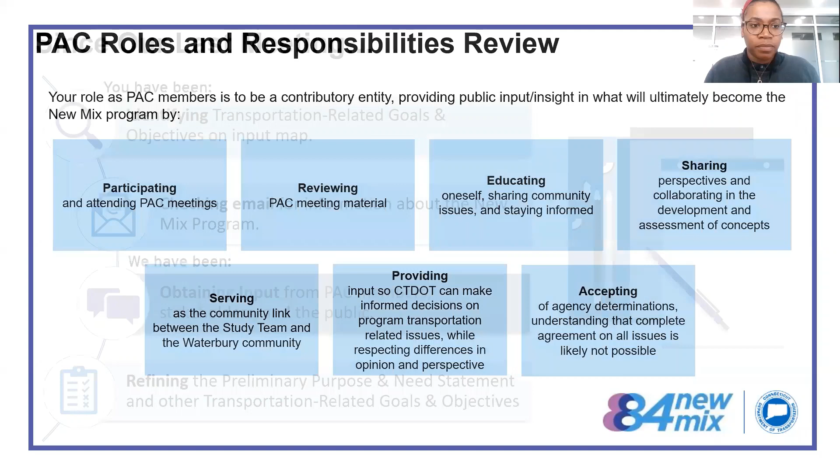Since our last meeting, you have been identifying those transportation-related goals and objectives on the input map, and also checking your email for any information on the New Mix program. On our side, we've been obtaining input from you all, the PAC members, and the public.

We've been taking that input and refining our purpose and need statement and other transportation-related goals and objectives. These next few slides will be very familiar, so I'll move through this quickly as a review of our first meeting.

What is the New Mix program? It's a long-term planning study looking to find a solution on how to reconstruct the Mixmaster interchange. We are using the federally recognized PEL, or Planning and Environmental Linkages approach for this study, in order to find the best solution for the Waterbury Mixmaster.

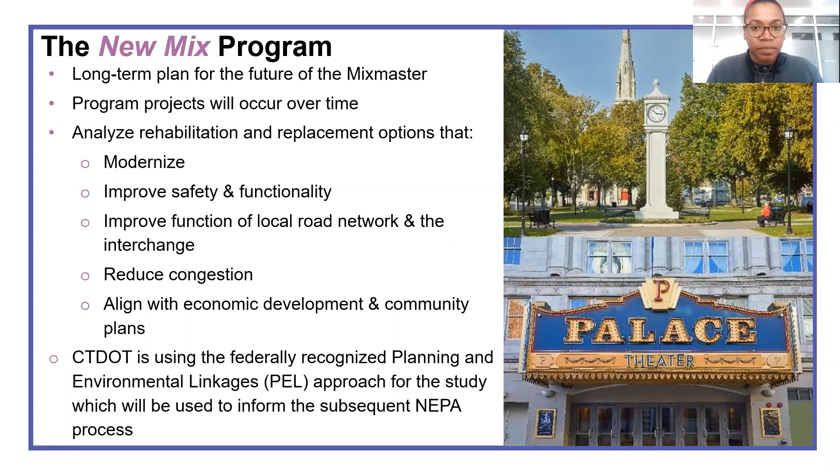We will be using this PEL approach to inform the subsequent NEPA process. This slide is also familiar - it depicts the anticipated steps in the full PEL process. As you can see, there are several steps we've identified to make sure this study is successful. Right now, we are developing our purpose and need and transportation-related goals and objectives.

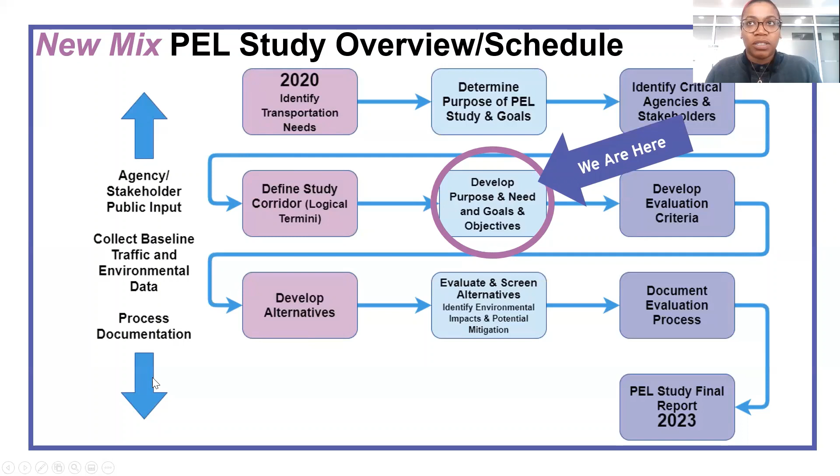There have been some ongoing research and study products produced to get us to this point in time. During this presentation, we'll be reviewing the data collected in our analysis needs and deficiency report, which corresponds to that first box - identify those transportation needs. I'll get right into that now.

The analysis needs and deficiencies summary - what is this report? It summarizes the details and results of the various studies performed as part of Connecticut Department of Transportation's planning process for the New Mix program. These studies consist of data collection efforts and engineering analysis for transportation, community, and environmental context features within the project study area. These studies have been collectively performed to identify the existing transportation network deficiencies and also to predict future deficiencies.

This report will serve as a source of information to develop the program's preliminary purpose and need statement as part of the PEL study process. That preliminary purpose and need statement will also be used in the subsequent NEPA, the National Environmental Policy Act process that follows the PEL study. This report is available for your review on the program website. After this meeting, I will send a link in the email where you'll be able to access this document.

In the next upcoming sections, my colleagues will review with you a few of the determinations that resulted from this analysis needs and deficiency report, including structural, geometric, traffic, multimodal, community, and environmental conditions.

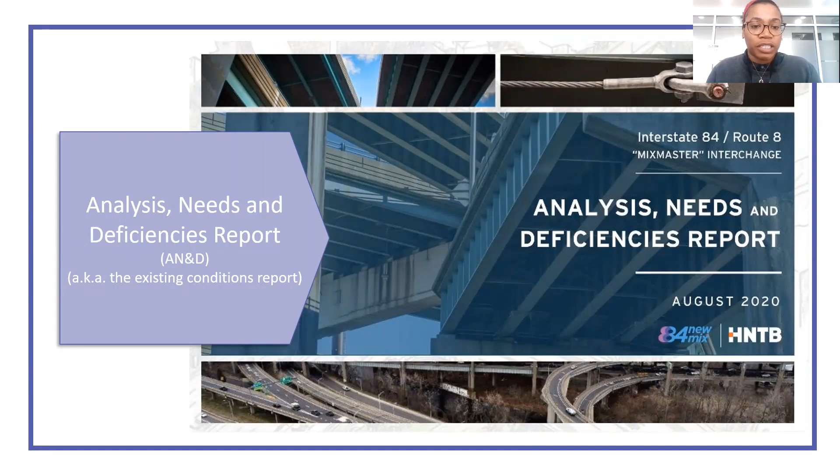Before we get into it, these are just some commonly used terms. I did send out the PDF prior to this meeting, so if you have any questions on any of these terms while we're going through the presentation, since they are recurring, just flip back to this slide and you'll find it. Two of the terms I wanted to touch upon are system ramp and service ramp.

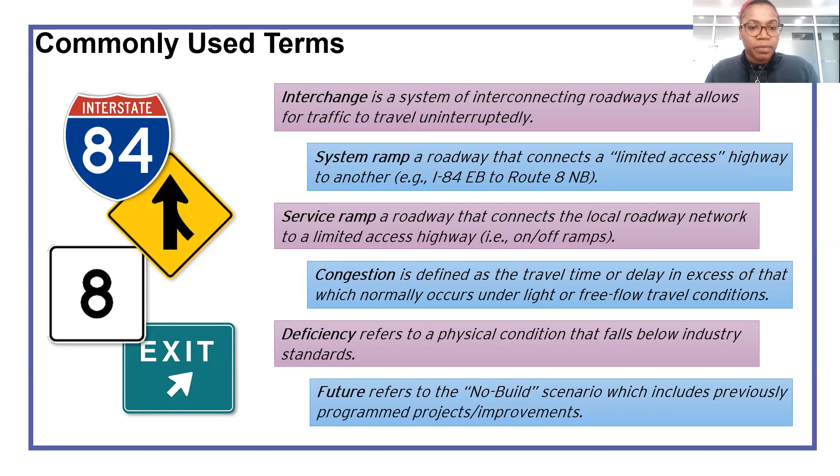A system ramp is a roadway that connects a limited access highway to another. For example, I-84 eastbound connecting to Route 8 northbound, or Route 8 southbound connecting to I-84 westbound - those are examples of system ramps. A service ramp is a roadway that connects the local roadway network to the limited access highway - what we colloquially call on and off ramps to access highway systems.

Now I'm going to hand it off to my colleague Chris to get into the structural portion of the presentation. Thanks, Naomi. This first section is going to be on structural deficiencies at the Mixmaster Interchange - these will be the existing structural deficiencies and anticipated future structural deficiencies. Whenever we say future during this presentation, we're referring to the New Mix program's future design year, which is 2045. You should all understand why we picked 2045 for the design year by the end of this section.

Back to structures - first, I'm going to introduce some commonly used bridge terms to help with everybody's understanding. We'll begin with that circular graphic on the left. These are the three main components of a bridge, and we're going to be working from the ground, moving up.

First, you have the substructure. That's the foundation of the bridge.

On top of the substructure is the superstructure. That's what gets you over the crossed feature. And then on top of the superstructure is the deck. That's more or less what the vehicles are driving on when they cross the bridge.

Decks are typically made out of reinforced concrete, and in Connecticut, we usually have a thin layer of pavement on top that we call a wearing surface.

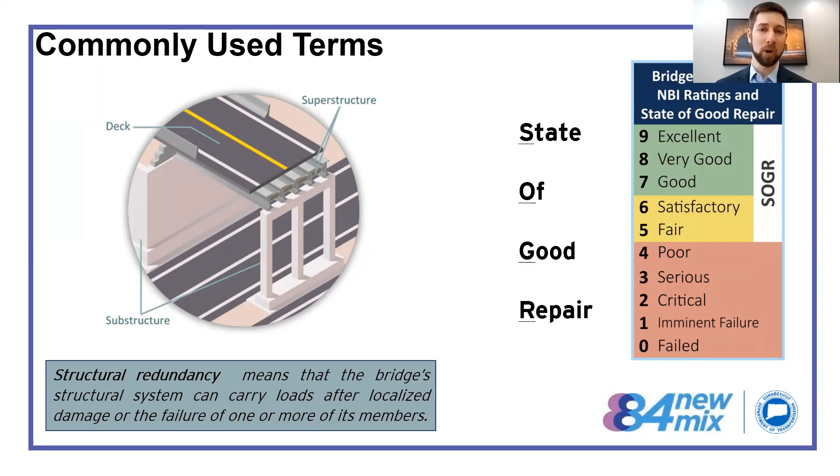Last thing we have on this slide in the lower left-hand corner is a definition that is structural redundancy. Structural redundancy is a best practice in bridge design that ensures that a bridge will stay standing if there is localized damage to a part of it. Structural redundancy is a good thing. So let's move to the next slide.

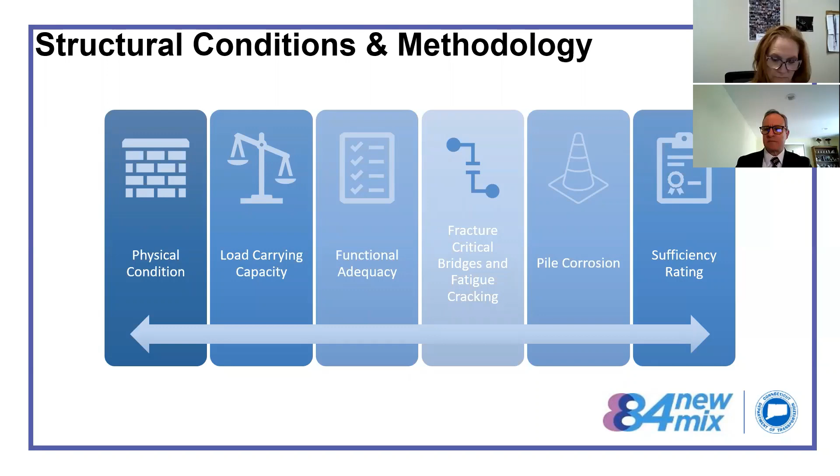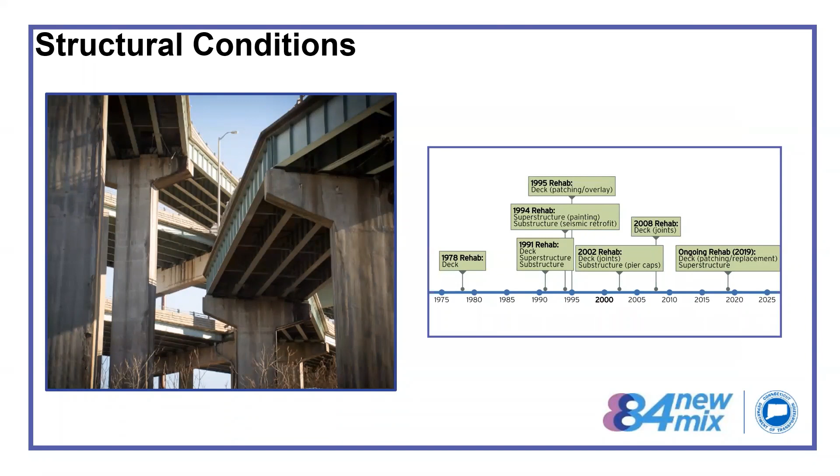All right, so on the left-hand side of this slide is a nice photo from the interior of the interchange, what we call the core of the interchange. I think it's looking north. This photo does a really good job showing the complexity of this Mixmaster interchange, showing the multiple stacked levels of bridges. You can also see those main bridge components that I introduced you to previously: substructure, superstructure, and then if you look really hard, maybe you can see the underside of a concrete bridge deck.

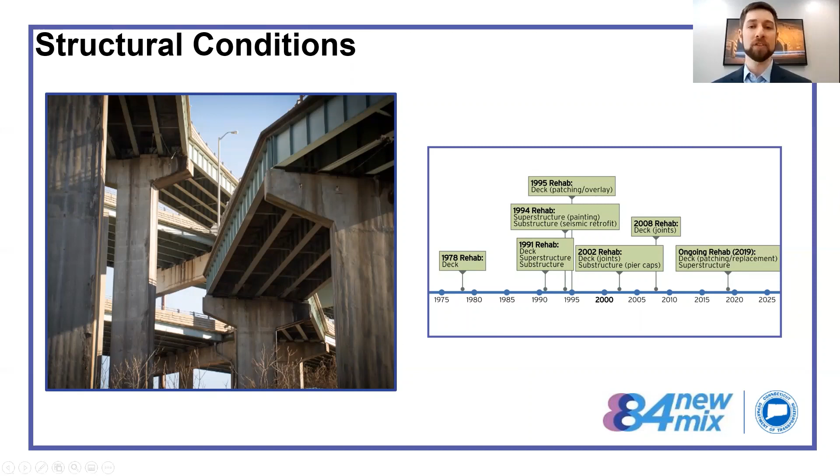On the right-hand side is a timeline depicting the rehabilitations that have been performed on the Mixmaster. So all of this infrastructure was built in and around the 1960s, and you can see that within about 20 years of the initial construction, the first rehab was already occurring, and that's continued every 10 to 20 years through the present day. There's a rehab project going on now to improve the physical conditions of the Mixmaster interchange, and many of you are experiencing the effects of that daily.

Periodic rehabilitations, they kind of come with the territory for structures that are exposed to the elements. As soon as they're built, they start deteriorating. It's just their nature. One thing that I'd like everybody to note is how frequently the bridge deck component shows up in these rehabs. Vehicular loadings and repeated winter applications of roadway salts put a lot of wear and tear on this bridge component, and that means that it requires more frequent rehabilitations.

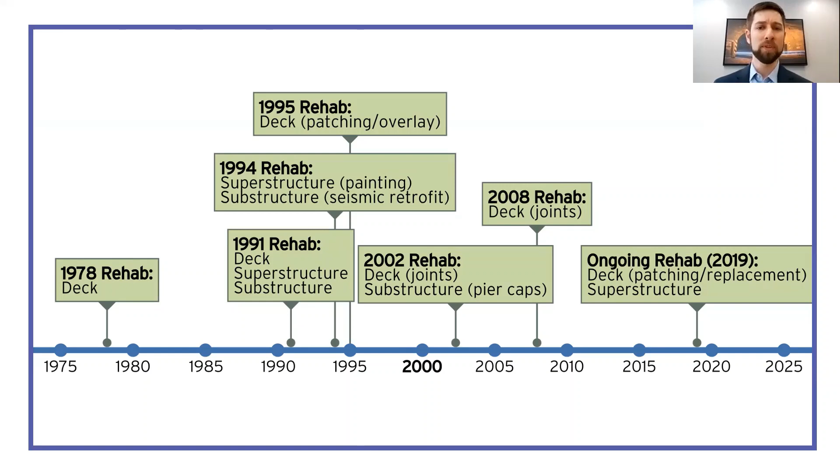So that's all the intro matter. If we move to the next slide, I can get into some statistics from what we studied.

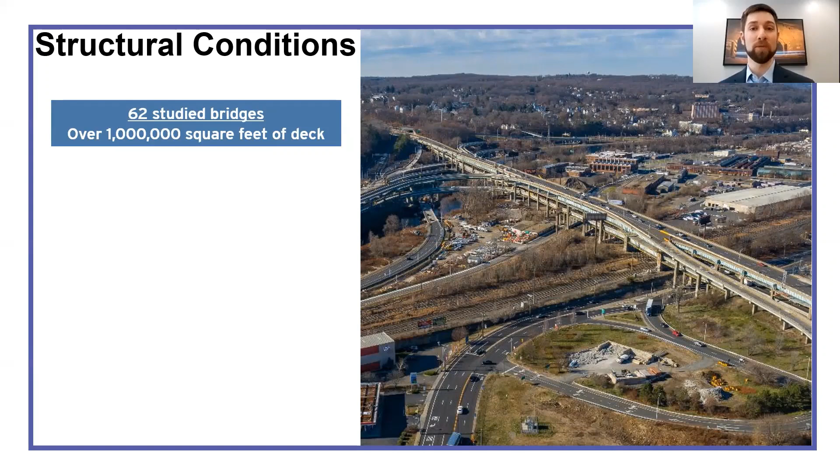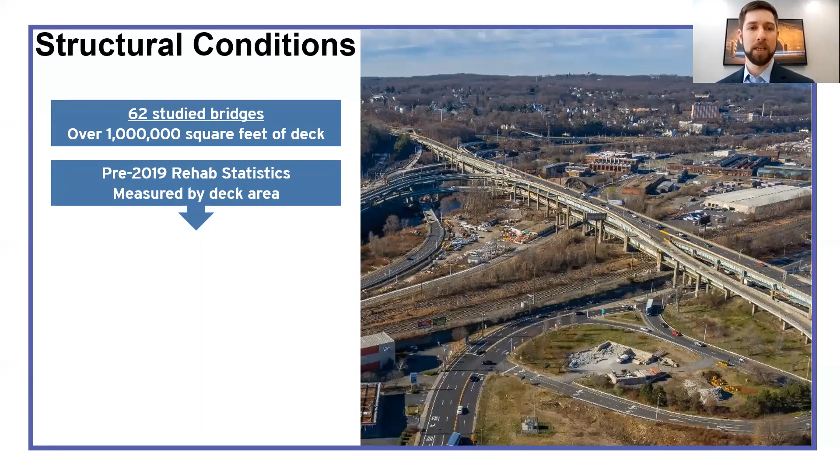So within our study area, there were 62 studied bridges with a combined bridge deck area that exceeded 1 million square feet. That's just a big number that's meant to impress everybody with the amount of bridges that are out there. Every statistic that follows from this point forward is going to be a pre-rehabilitation statistic. That is when our data collection was performed, and it's the best information that we have to share. So we did want to share it with you. However, just keep in mind that at the conclusion of the ongoing rehab project, some of these numbers will be out of date. So one last note, these are stats that are measured by deck area, not number of bridges.

So the first one is structural deficiencies, and that's bridges that are in overall poor condition. At the time of our data collection, 60% of the bridges by deck area were structurally deficient or in poor condition. Now, classifying a bridge as structurally deficient does not mean that there's a safety issue.

However, it does mean that the deficiencies are notable enough that they require maintenance, rehabilitation, or replacement. Hence why the rehab project is ongoing right now. Again, at the end of that rehab project, this is no longer going to be the case. These bridges will be brought up to a state of good repair, and they will remain that way for a time. The rehab project is a temporary measure to extend the service life of the interchange.

Next stat, over 40% of the bridges measured by deck area were functionally obsolete. What this means is that the bridges were either too narrow or too low to the ground. Too narrow meaning that maybe they couldn't fit the required number of travel lanes or shoulder widths on top, or too low to the ground. The vertical clearance that they provided was not adequate for some vehicles to travel underneath them.

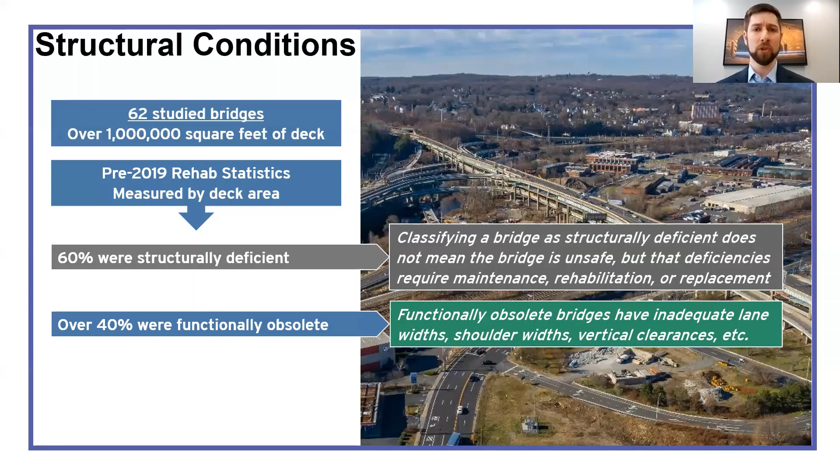This is something that's not typically corrected during a rehabilitation. It is something that we would look to address in our new mix reconstruction.

Last statistic is about fracture critical bridges. 19% of the structures that are out there as measured by deck area are fracture critical bridges. Fracture critical is a term that is the opposite of structural redundancy. It means that the bridge contains members where it is very important to get up close and hands-on during an inspection to make sure that its condition is fair or in good condition. So this is a feature that we don't typically put in a modern bridge, and it is something that we would, again, look to correct in our future reconstruction of the interchange.

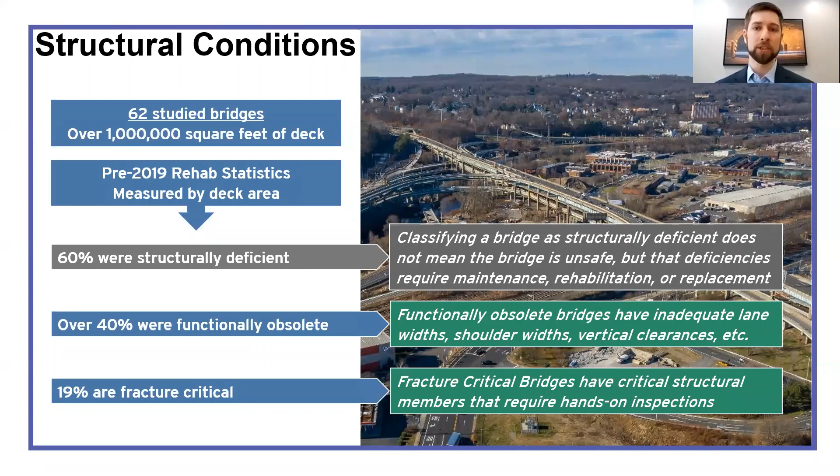And this is exactly why 2045 is our future design year for the New Mix reconstruction and this PEL study.

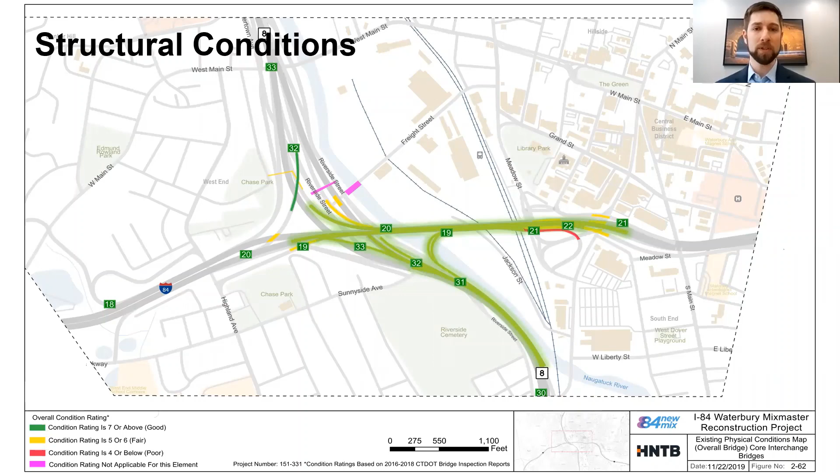So that's the end of the structural conditions overview portion of this presentation. I'm going to hand it off to David Schweitzer, and he's going to provide a summary of highway geometric deficiencies. So, David? Thank you, Chris.

All right, the geometric analysis section of the Analysis Needs and Deficiency Report looked at all the major roadways within our study limits. This includes I-84, Route 8, the system ramps, and the service ramps.

9 of the major criteria that we looked at are shown here on the slide, and these criteria were established through the CTDOT Highway Design Manual and through AASHTO policies. Now, each of these major criteria are interrelated in that they can kind of feed off of each other, and the main purpose of these criteria is to provide efficient travel, that it has safer conditions, and meets driver expectancy.

Of these criteria that we looked at are the design speed of the roadway, the travel lane and the shoulder widths, the horizontal alignment of the roadway, the vertical curvature, stopping sight distance, cross slopes of the roadway, the super elevation when it's in a horizontal curve, the vertical clearance with other structures, and then also the intersection sight distances.

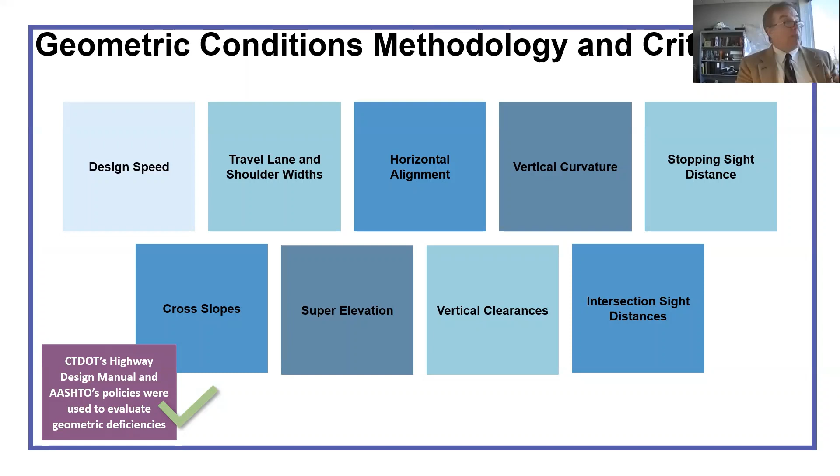Now, how we broke this down, we're not going to get into that here, but when you look in the report itself, there are a bunch of matrices that will be in there, and they will break down each of the roadways, maybe possibly in different segments for each of these criteria, and it'll be rated on a scale of green being good, that everything met the criteria, yellow meaning it marginally passed within that segment of the roadway, and then also red where a piece of that roadway did not meet the criteria. So those are the major criteria that we look at.

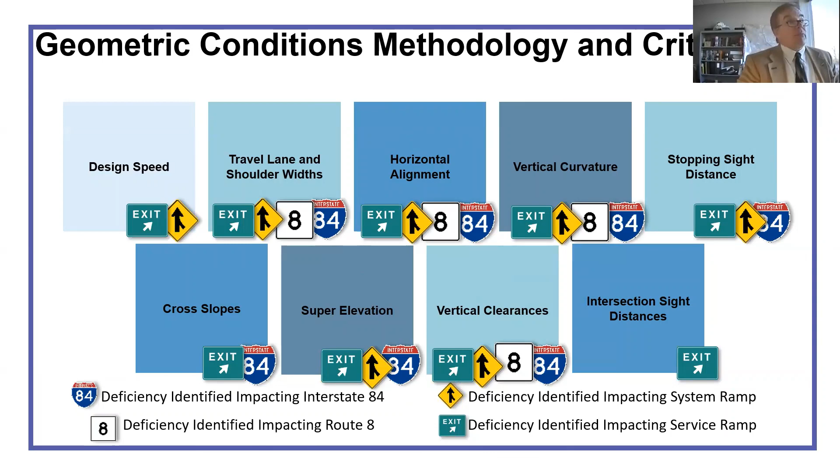And if you look, when we break the roadways down as they show up here, you will start to see the symbols come up if something did not meet or you had criteria that did not meet. So you can see we had a lot of deficiencies here with I-84, Route 8, and the system and the service ramps. Additionally to these major criteria, next slide, please.

There were other graphs in there, and one such example here, a little bit busy, but just to get the point across, is this is showing where there are left-hand entrance or exit ramps.

You'll also see on here there are T's, showing where interchanges are spaced very closely, which allows for less merge, weave, and diverge distances. These are all factors that can lead to speed differentials and conditions that aren't as safe. So this whole section looks at the geometric analysis within that report, broken down by segments. That's about as far as we want to get into it here at this meeting.

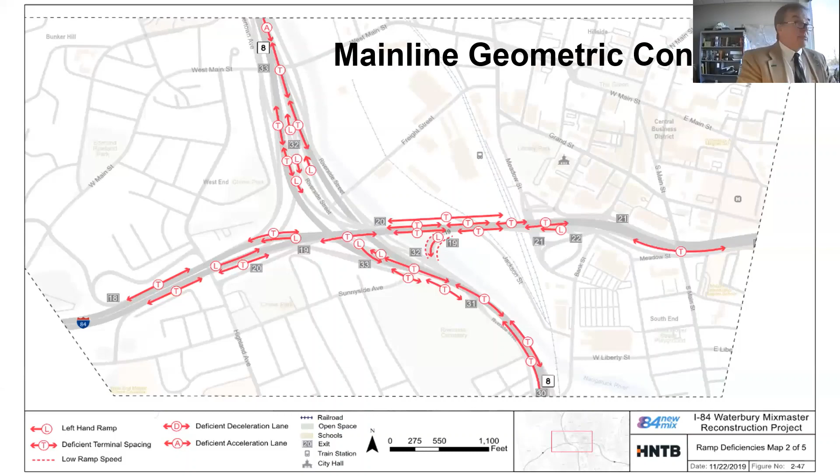We're going to provide a brief overview of the traffic analysis and safety. First, when we begin looking at traffic characteristics for a project, we first need to define a study area. This graphic shows the general extents of the study area along I-84, including interchange 17 on the west side at Chase Parkway, to the east at interchange 23. Additionally, along Route 8, we've included the northern extent at interchange 35, all the way to the south at interchange 30.

We've included within this section 65 intersections which were evaluated, and we also collected data within this region of the study area. Along the highways, we collected data for a full day period during weekday as well as the weekend. At these 65 intersections, which include ramp termini as well as local intersections, we collected data for weekday AM and PM peak hours, as well as a Saturday selection at approximately 12 locations in the vicinity of the Brass Mill Shopping Center in the downtown area.

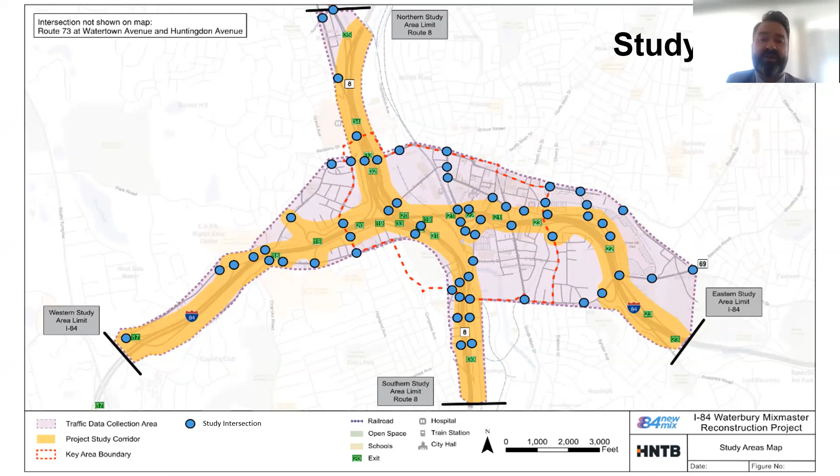These graphs show 2016 continuous count station data representing daily traffic along I-84 and Route 8, broken down by hour as a percentage. This is a general look at the pattern of traffic you likely experience every day as you travel through the area. On the left-hand side for I-84, you'll note that in the eastbound direction, the soft purple color, there is a larger percentage of traffic in the PM peak, while in the westbound direction that is shown as a higher percentage in the AM peak.

You'll note that this is actually collected west of the interchange. Depending where you are in the interchange, these patterns may change slightly. So if that is not in your recollection for the pattern, that would explain why it's to the west of the interchange. Along Route 8 on the right-hand side of the graphic, you'll see a similar pattern, collected north of the interchange. Route 8 northbound exhibits a higher percentage of traffic in the afternoon, whereas Route 8 southbound exhibits a higher percentage of traffic in the AM peak hour during the weekday.

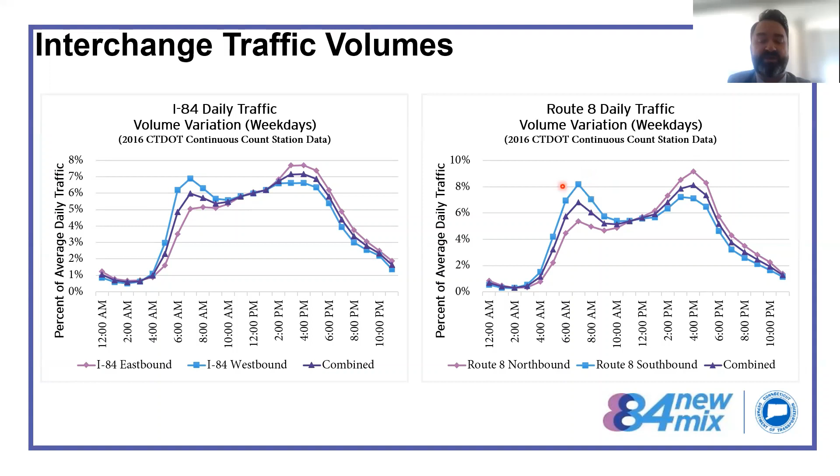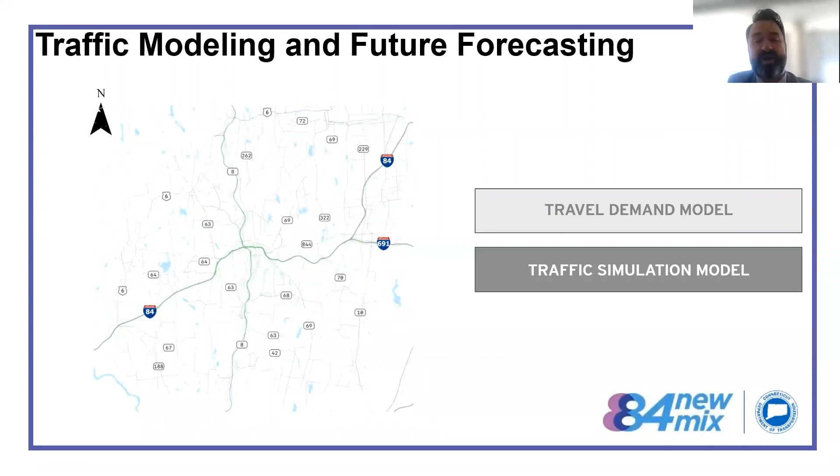This traffic data that we collected throughout the study area was used to refine a travel demand model, which is a statewide model used to reflect regional traffic and patterns related to employment, population, as well as land use, which is then simulated to filter through the highways onto the local street. This creates a basis for projecting into the future 2045 build condition that Chris mentioned earlier.

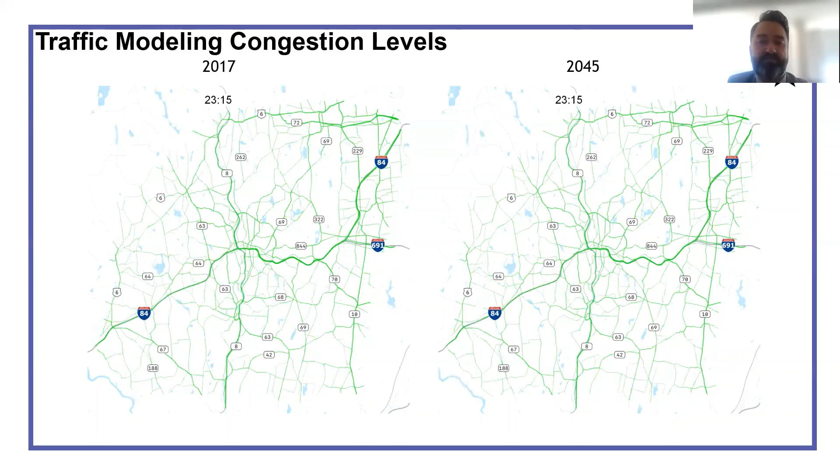The original design for the Mixmaster Interchange was projected with an approximate 100,000 vehicle capacity based on a 1975 build condition year. Today, we've far surpassed that. We experience approximately 190,000 vehicles. Under projected 2045 conditions, the growth is expected to continue to the tune of approximately 225,000 vehicles, far exceeding the interchange capacity.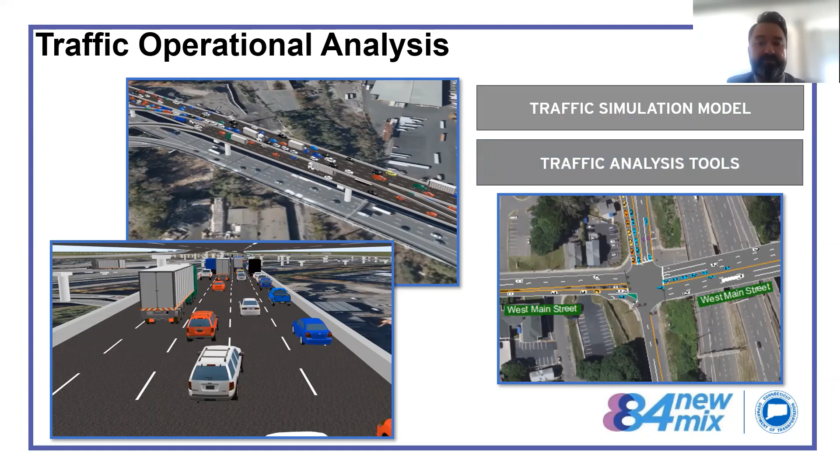You can also, on the right-hand side, see a snippet of a traffic analysis tool, which uses input based on the traffic information we collected to estimate traffic conditions based on industry accepted equations and formulas.

This simulation shows the VISSIM software simulation of traffic conditions under future 2045 conditions in the critical area of I-84 eastbound between the Route 8 northbound system ramp and the exit 21 and 22 off ramp to the downtown area. You can see here we are forecasting sustained congestion and a critical breakdown in traffic operations. We'll also mention this later in the presentation.

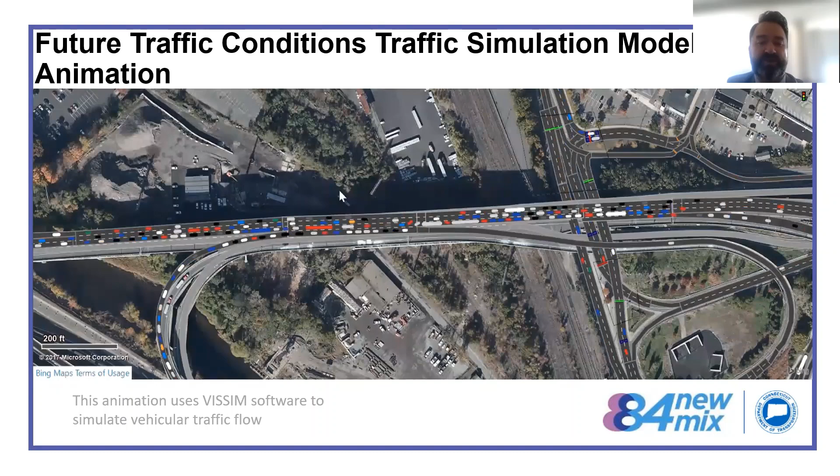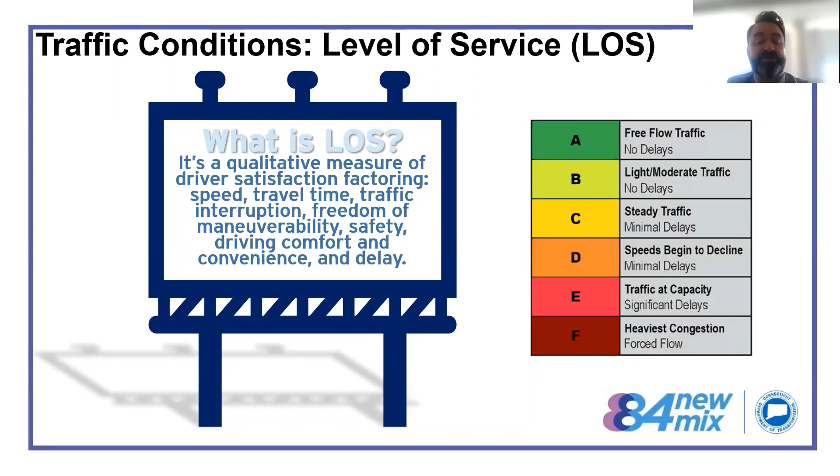In general, the way we describe traffic operations is often summarized as a general level of service, which is an overall view of many measures of traffic operations that people experience, including speed or delay. It's broken down into a grade school scale, level of service A being the best, F being the worst. Here, level of service D is considered acceptable, so the acceptable range is generally A through D, while E and F are considered operationally deficient.

Throughout the study area, we analyzed 65 local intersections. Under 2017 conditions, we identified 8 of these locations as operationally deficient. Under 2045 estimated future conditions, we forecasted more than double these locations, with 17 expected to be operationally deficient.

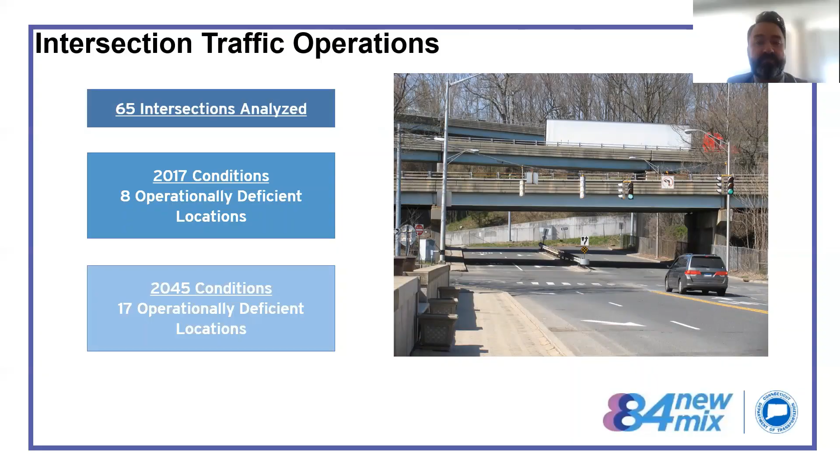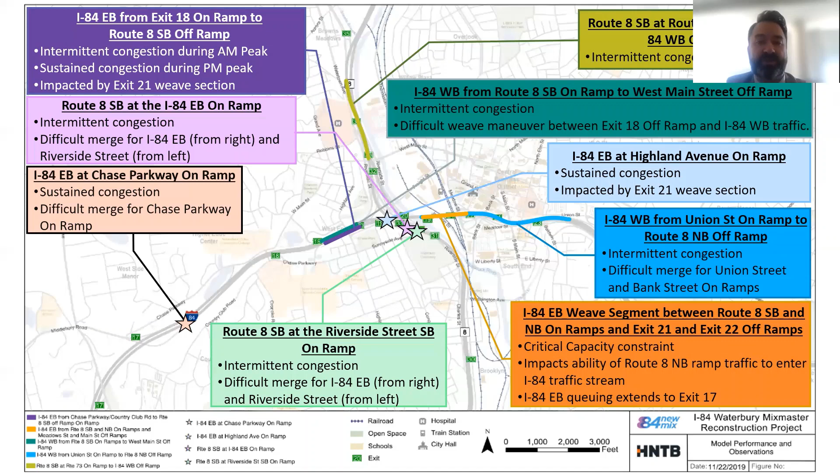This graphic denotes the critical locations we identified as part of our highway analysis. I'll focus on the bottom right-hand corner. As mentioned in the model simulation, the I-84 eastbound weave segment between the Route 8 northbound on-ramp and the exit 21 and 22 off-ramps already experiences delays today, but under future conditions becomes a critical capacity constraint. This not only blocks traffic from Route 8 northbound from entering the I-84 traffic stream, but creates an expanded spillback effect all the way to Chase Parkway, where traffic is expected to queue and experience significant congestion throughout the study area.

At this point, we'll move on to the safety discussion.

Crash data was collected for the initial study based on a 3-year period between January 1st, 2015 and December 31st, 2017. It's important to note this is the most recent data available, since various construction projects, including the widening project to the east and the rehabilitation of the Mixmaster Interchange which began in 2018-2019, don't allow us to get more relevant recent information beyond this period.

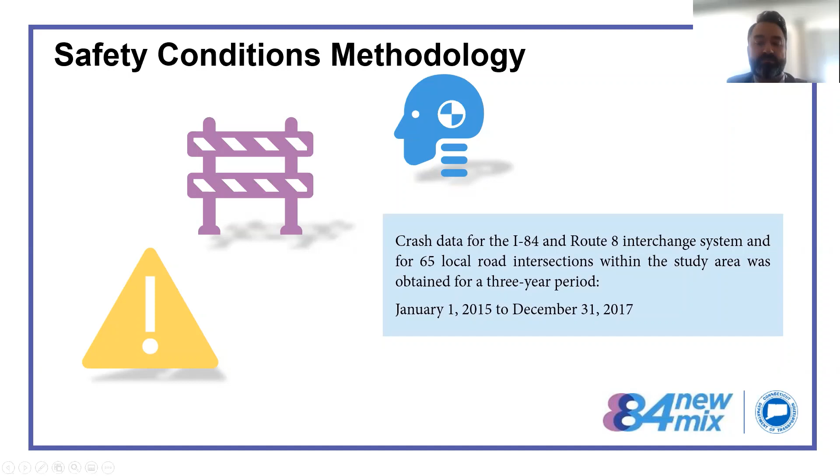Relative to the local intersections, we've identified 36 of the intersections shown on this map with a dark maroon circle as being high crash intersections. Notable high crash corridors include West Main Street and Washington Street. We've also noted several vulnerable user crashes, such as those involving bicycles or pedestrians, generally located in the downtown or Brass Mills Mall area.

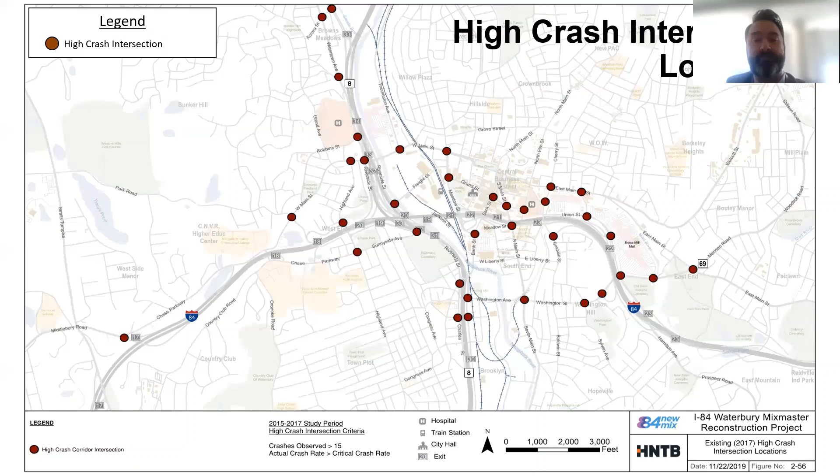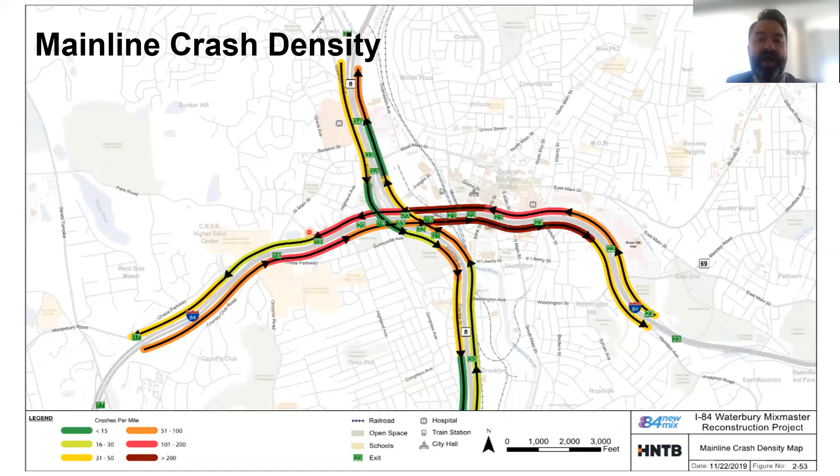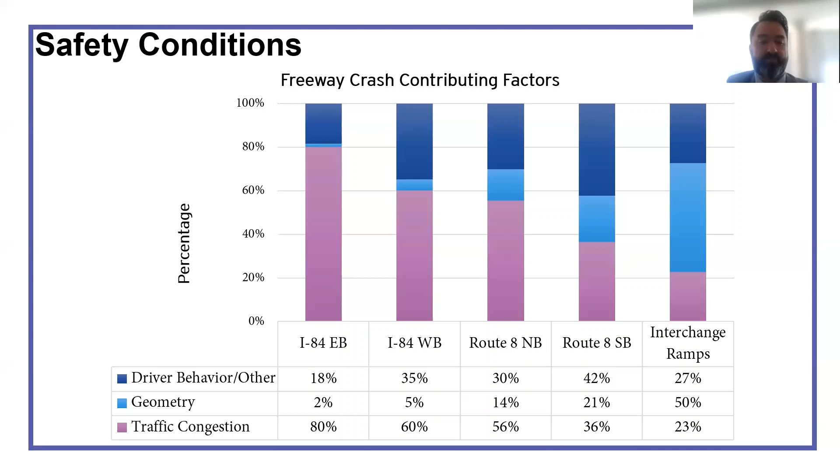So right now we're going to take a second to get your input. I'll bring up a quick poll for you all to take very quickly. We'll stop here to get an idea of how our analysis for the structural, traffic, and geometric compares with your lived experience. Do you mostly agree? Is there anything that stands out to you that doesn't quite make sense? I'll give us a couple of seconds to get that feedback from you all.

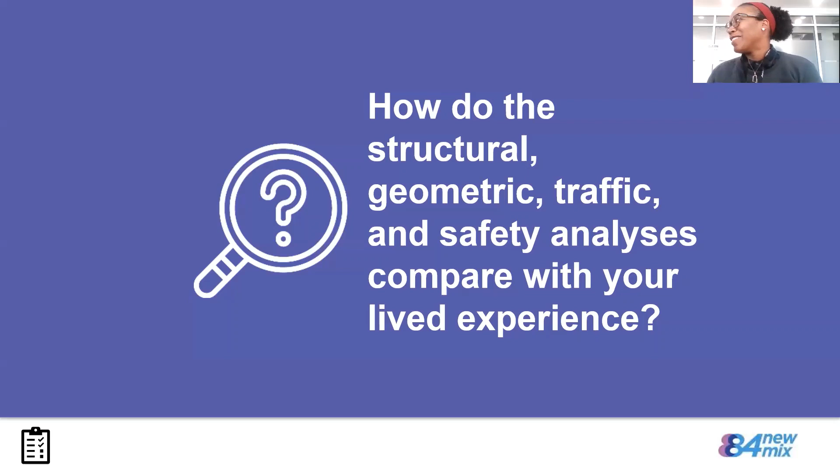Oh, this is good, we're getting really great feedback from you all. It's looking like most of you either agree, moderately agree, or are fairly neutral with the information that was provided. Feel free to ask any questions if you have any, or if not, I'll just move on to the next section. I'll give another minute or two to finish this poll. There's a few people who did not participate.

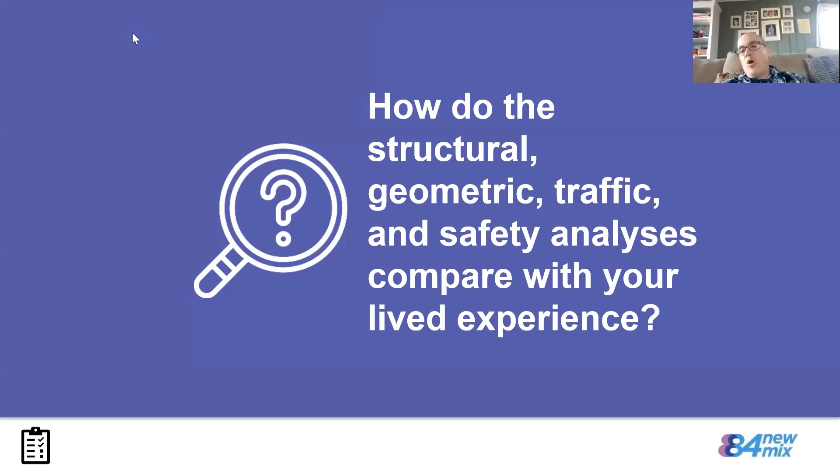Well, thank you, yeah, I just hope those things are being considered as well, beyond this project. I mean, obviously you guys can't control all of that, but it's a disaster. Yeah, we're definitely taking all transit into consideration, and looking at the plans that are ongoing in the Waterbury area and within the region as well. And if any of my colleagues want to chime in, feel free, they can speak better to it.

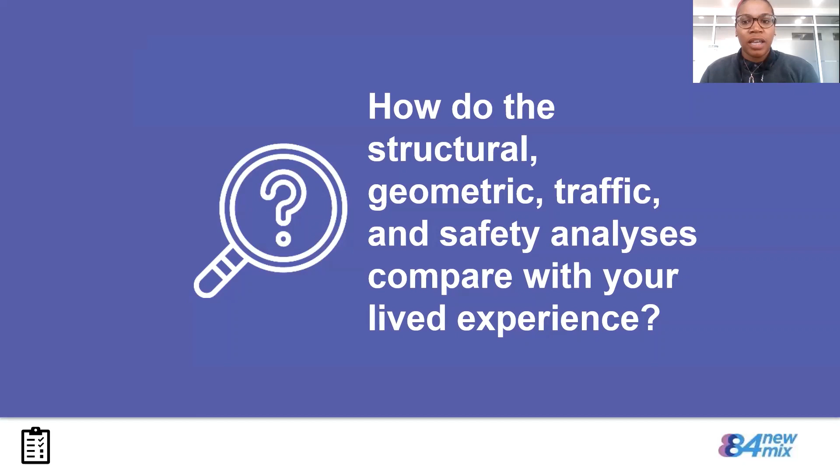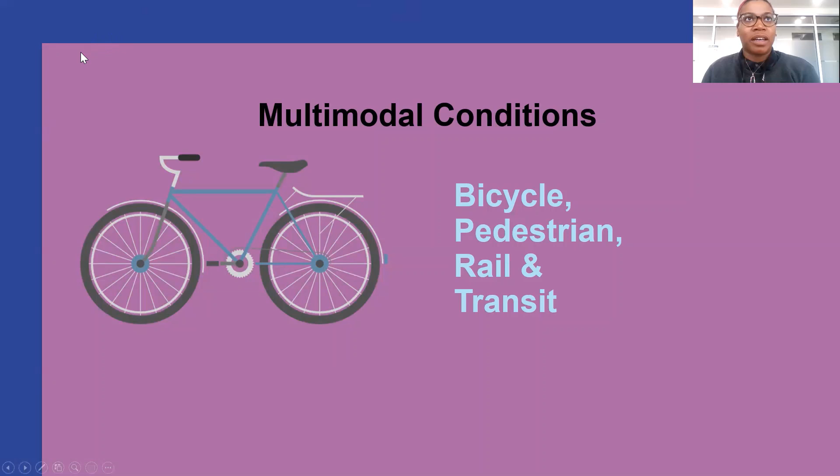Okay, all right, great, so I'm going to move on to the next section. In the next section, we will be going through those multimodal conditions, discussing bike, ped, rail, and transit, and what's going on in that area. I'll give that to Katie. Great, thanks, Naomi. So let's look at the next slide, please.

From a bike-ped perspective, some of the concerns are that the routes aren't Americans with Disabilities Act compliant, also known as ADA compliance. That's due to conditions such as narrow passageways, lacking crosswalks, and lacking curb ramps. Also, when having to cross under the underpasses, they are very dark, which could be very uncomfortable for someone walking or biking.

And the routes lack visual cues, such as crosswalks, crossing signals, clear striping, or bike lanes. Those visual cues and amenities are twofold important because they alert drivers to be on the lookout for bicycles and pedestrians, giving them a heads up that someone could be traveling via one of those modes. It also informs pedestrians that they're welcome to use this route, and that it is a route for them.

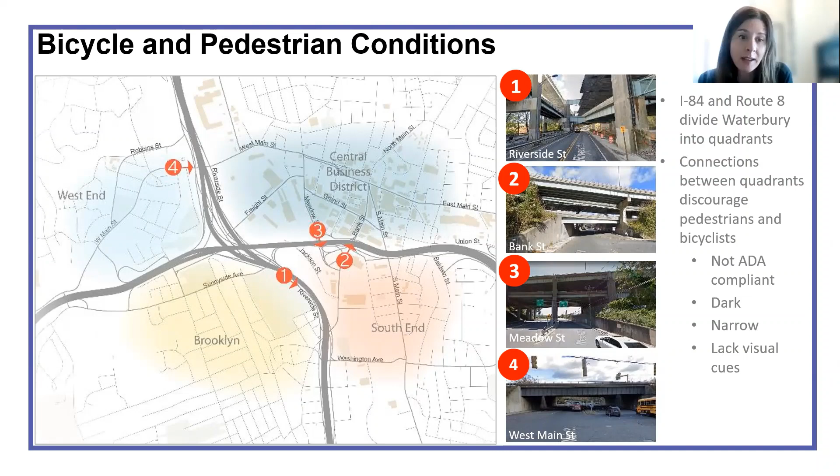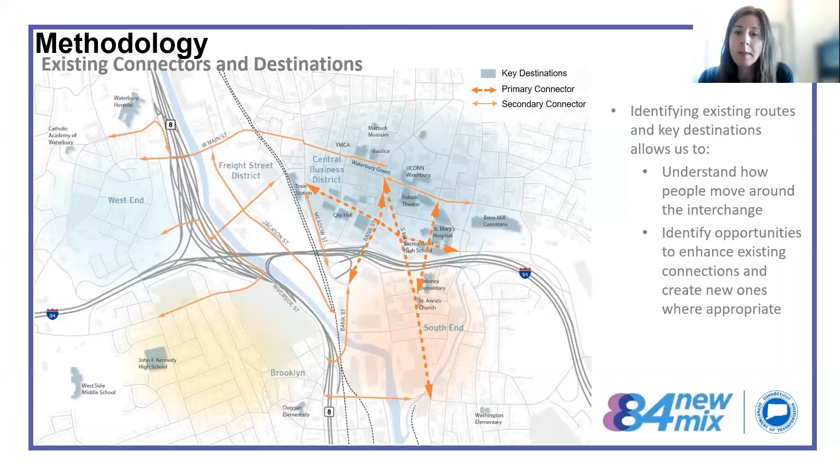And then the solid orange lines that are a little lighter in color are routes that could really serve an important function connecting various neighborhoods to one another, but are not frequented as much right now due to that difficulty of crossing under or through that interchange. Similar to the dark orange option, those routes as part of this project could be improved, incorporating ADA, bike demand if there's bike lanes, streetscape amenities, etc.

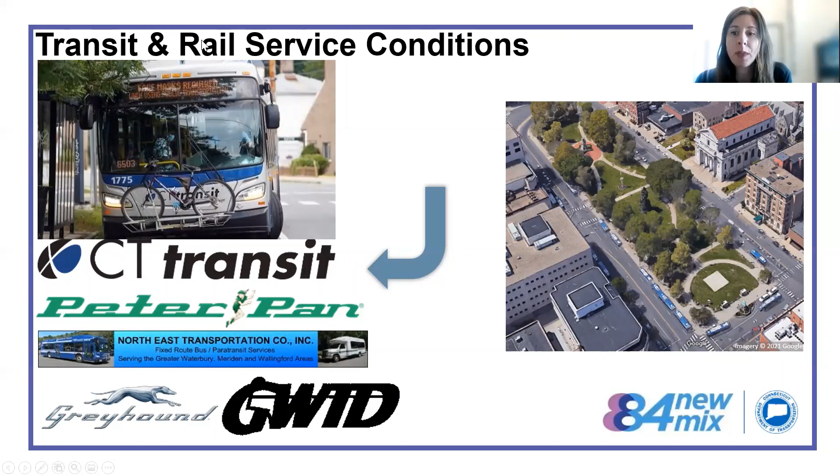We're also looking at transit and rail service conditions. While this project is not focused on developing transit or rail service, we want to make sure we're looking at where those existing services are, where the bus routes and bus stops are, where the rail station is, and consider how we can facilitate safe routes and linkages to transit through this project.

Now, next slide, we'll look at some of the environmental and community conditions that we've been looking at as part of this early study.

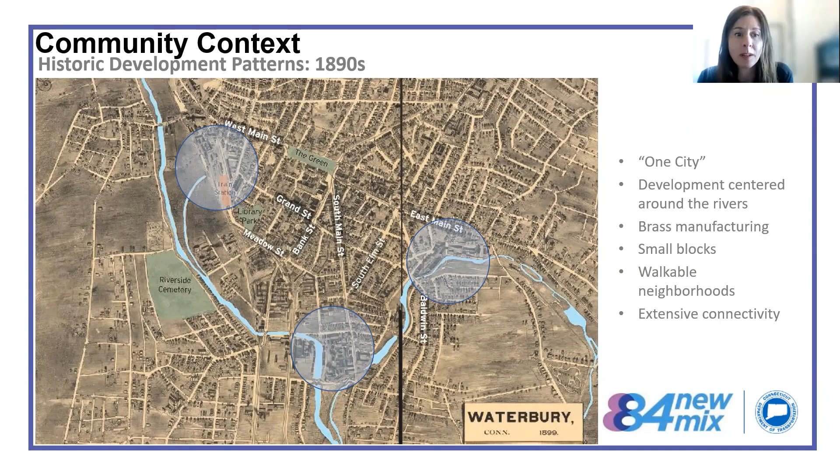We find it really useful to look at the evolution of development in Waterbury, to frame just how we got to where we are today. You can see in this 1890s map an overarching one-city feel. The major heart of the city is nestled between the Naugatuck and Mad Rivers. You see the brass manufacturing sites highlighted in the blue circles, and really extensive connectivity — you already see West Main Street and South Main Street connecting people up to the town green, with bridges crossing over the Naugatuck so folks from the west or the east could get back and forth over that river.

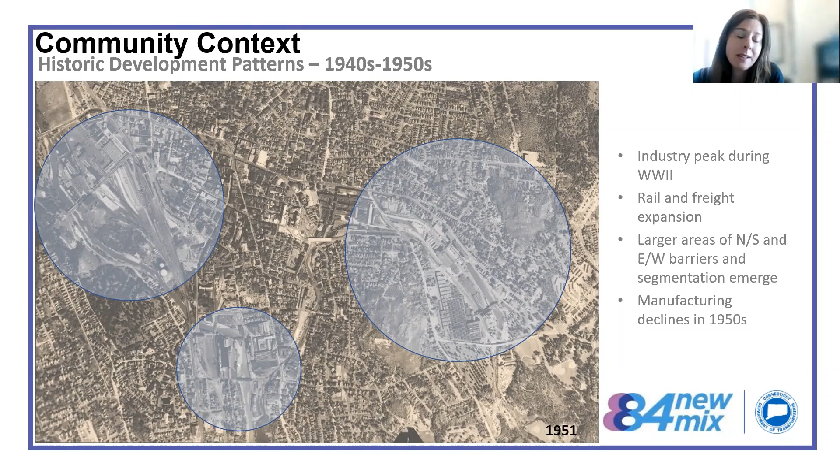In the next slide, we see the 40s and 50s, and we can see that as industry hit its peak with World War II, these three industrial areas really increased in size and started to show barriers forming between neighborhoods, especially with the large rail and freight yard to the west near that top left circle, which really begins to segment the city. By the end of the 1950s, manufacturing started declining after the war.

So that leads us to today — the 60s through today. In the late 50s, early 60s, and throughout the 70s and 80s, highway development was progress. It was a really positive, exciting thing leading us into the future, supported around the country as part of the Federal Highway Act. It was an exciting time.

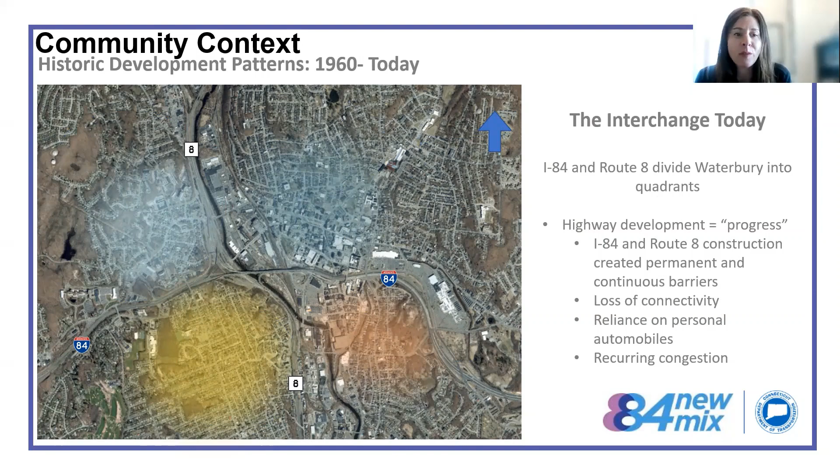At that local level, developing this interchange over those decades really served to complete that permanent and continuous barrier between neighborhoods that we had started to see with those enlarged industrial areas. This meant loss of connectivity, and reliance on personal automobiles became very important, which led to larger lot development as we needed parking lots. Then the parking lots continue to make walking a less accessible option, and that cycle continues to lead to more recurring vehicular congestion.

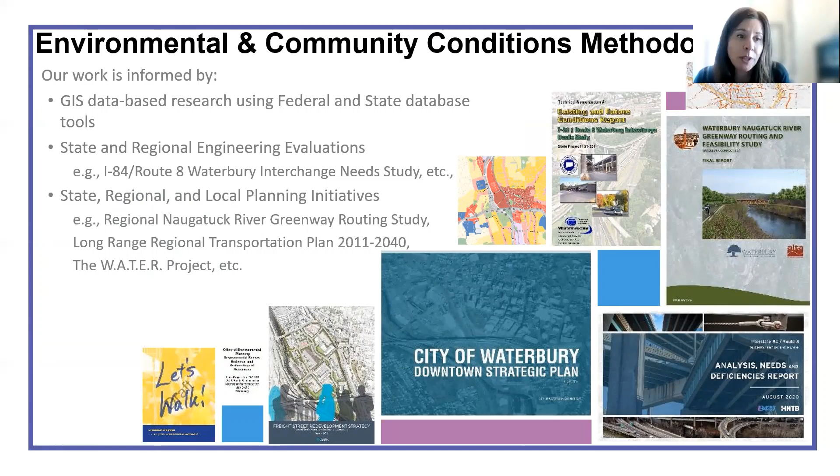Next slide. So just some more background on what we've been doing. We have been looking at the environmental and community conditions, undertaking geographic information system research, or GIS, familiarizing ourselves with previous state and regional engineering studies to make sure we're not reinventing the wheel but using the information that's already out there. And of course, we really wanted to study all the local planning initiatives that have gone on.

So we'll look at that a little more. For example, we've gone through many of these great planning initiatives done in this region, and mapped some of those visions so we can understand how this construction could be utilized as an opportunity to implement some of the visions of these past planning studies.

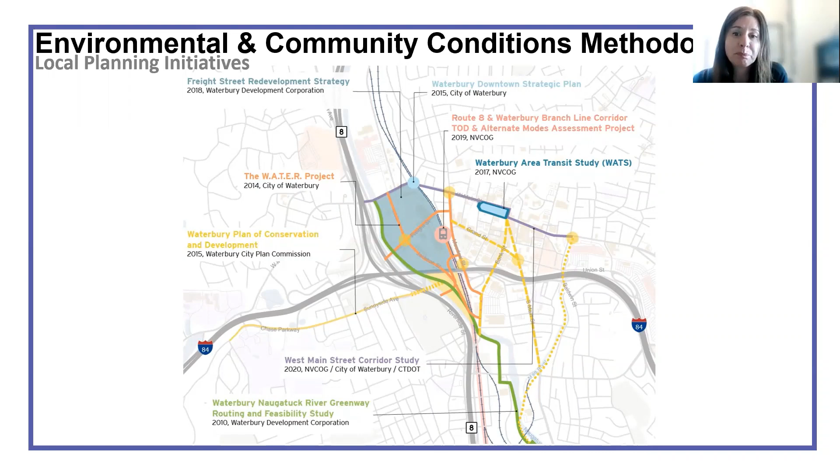In the next slide, we looked at the GIS mapping. Naomi talked about this a bit more as part of the Needs and Deficiencies report. We looked at various conditions through GIS mapping: land use, socioeconomics, environmental justice, trying to understand where these communities are, what the key community resources are - hospitals like St. Mary's and Waterbury Hospital, cultural resources like the Mattatuck Museum, educational resources like UConn, secondary schools, and Naugatuck Valley Community College. We also mapped parks, water bodies, and other ecological features, which Naomi will talk about more now.

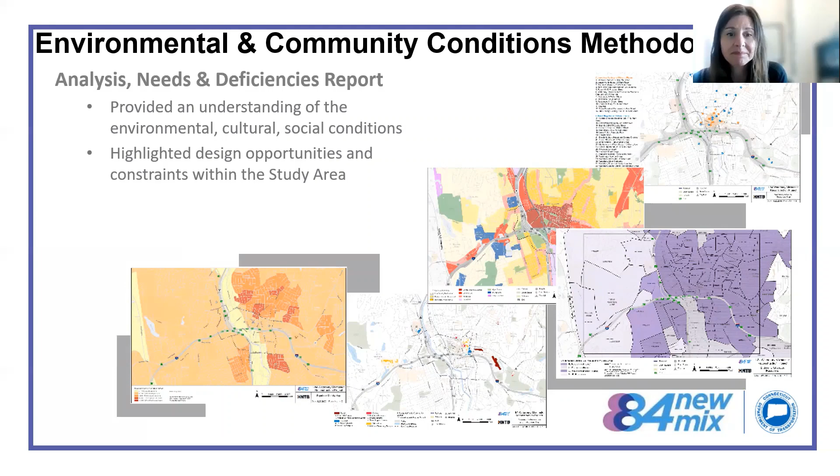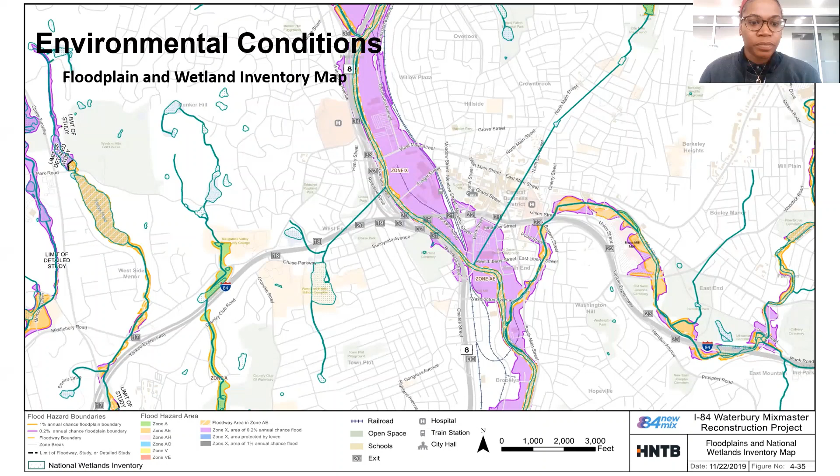At this time, we'll stop again to get your input on our multimodal community environmental analysis. We want to get a gauge on how you all feel about how we've highlighted those existing conditions in the Waterbury area. The poll should be live now. Did anything in our community environmental contextual analysis stand out to you? Are there any general questions? Are there any features, positive or negative, that define Waterbury to you? Feel free to insert any info or questions into the chat, and we'll give some time for discussion.

I see a good amount of response so far. I do see a couple of moderate disagrees. For those of you who selected that, if you want to speak up and discuss what maybe we missed in our current analysis or where we could improve, that would give us a better idea of what we're not touching upon that you'd like us to address.